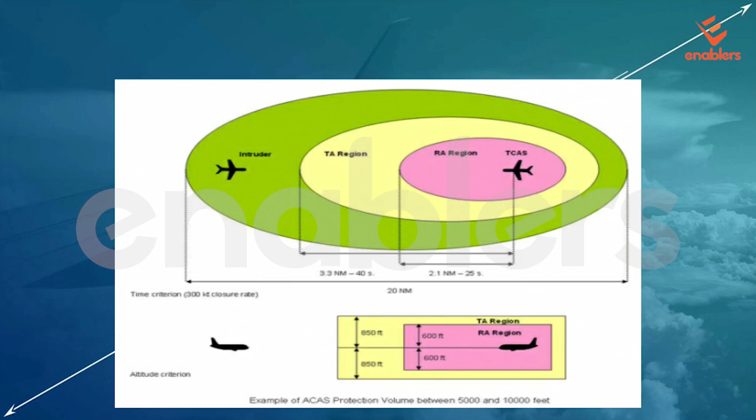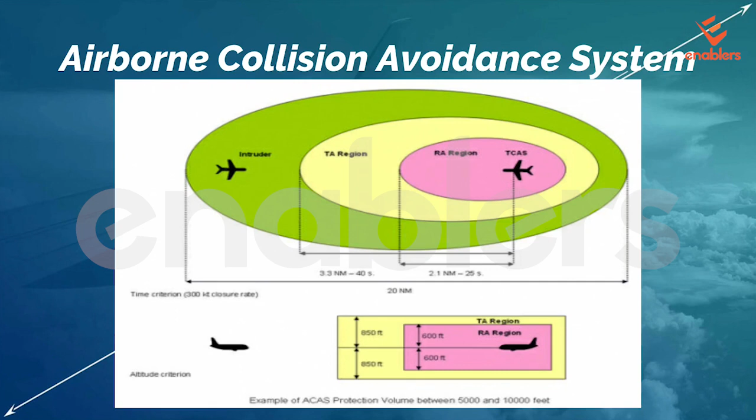An aircraft system which is based on secondary surveillance radar transponder signals, which operates independently of ground based equipment, and it is used to advise the pilot on potential conflicting aircraft that are equipped with SSR transponders, meaning secondary surveillance radar transponders.

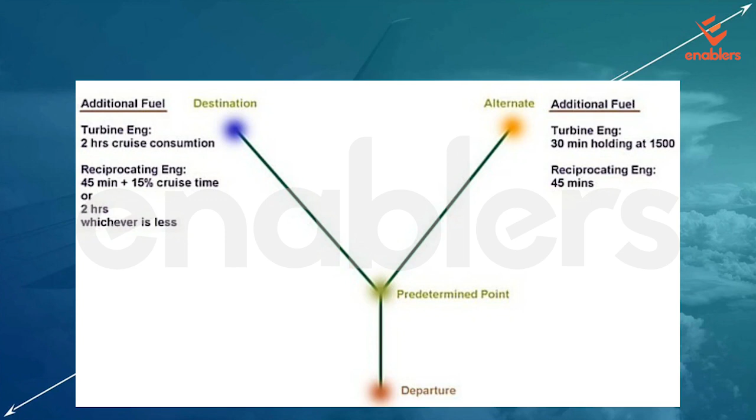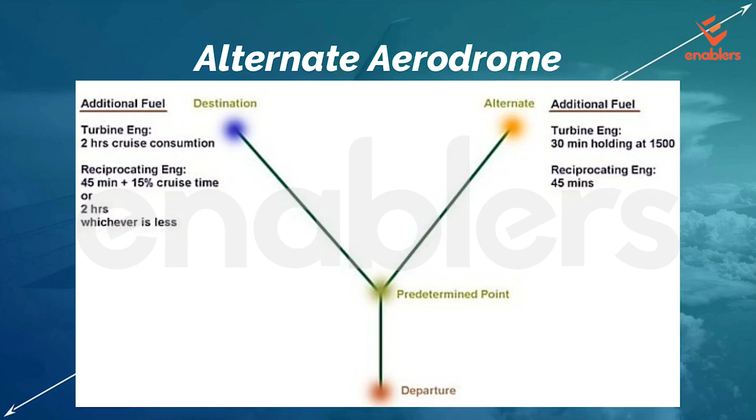Alternate aerodrome includes the following: First of all, takeoff alternate - an alternate aerodrome at which an aircraft can land should this become necessary shortly after takeoff, and it is not possible to use the aerodrome of departure. This is takeoff alternate. Next is en route alternate.

En route alternate is an aerodrome at which an aircraft would be able to land after experiencing an abnormal or emergency condition while en route.

The next are the requirements for the en route alternates. These are specific requirements, like according to Federal Aviation Regulation Part 139, the en route alternate must be certified, and they must be suitable to safely operate the aircraft, and they must have a minimum RFF index A or category 4 according to ICAO.

They must have response capability within 30 minutes. Must have field reporting conditions and reporting METARs and instrument approach. The airport must be available but it does not need to be continuously open. These are all the requirements for the en route alternates.

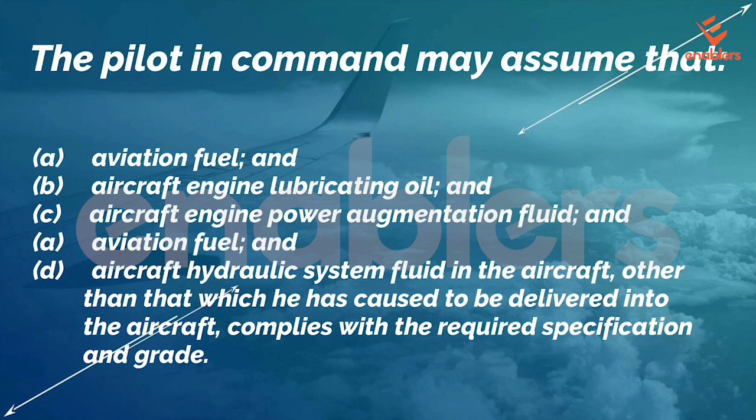Pilot in command of an aircraft shall ensure that the aircraft is not flown unless the aviation fuel, aircraft engine lubricating oil, aircraft engine power augmentation fluid and aircraft hydraulic system fluid used in connection with the services or operation of the aircraft complies with the specification and grade required or approved for the purpose by the authority. The pilot in command may assume that aviation fuel, aircraft engine lubricating oil, aircraft engine power augmentation fluid and aircraft hydraulic system fluid in the aircraft, other than that which he has caused to be delivered into the aircraft, complies with the required specification and grade.

Next is fueling of aircraft and location of aircraft. During fueling operations, the aircraft and ground fueling equipment shall be so located that no fuel tank filling point or vent outlet lies within 5 meters of any sealed building, within 6 meters of other stationary aircraft, within 15 meters of any exposed public area, within 15 meters of any unsealed building in case of aircraft with a maximum takeoff weight in excess of 5,700 kg, and within 9 meters of any unsealed building in case of aircraft with a maximum takeoff weight not exceeding 5,700 kg.

5,700 کلوگرام۔ نیکسٹ از فیولنگ ود پیسنجرز آن بورڈ۔ اس چیز کو انشور کیا جاتا ہے کہ پیسنجر ایئرکرافٹ پر نہ ہوں جب ایئرکرافٹ فیولنگ ہو رہی ہو۔ ایئرکرافٹ پر پیسنجر ہوں نہ انٹر ہو رہے ہوں یا ایئرکرافٹ سے نکل رہے ہوں، مطلب تب ہی فیول جو ہے وہ لوڈ ایئرکرافٹ میں نہیں کیا جاتا۔

ایئرکرافٹ میں فیول جو ہے وہ لوڈ کیا جا رہا ہے اور پیسنجر آن بورڈ ہیں یا انٹر ہو رہے ہیں یا لیونگ دی ایئرکرافٹ، دے آر ٹولڈ دیٹ fuel is loaded. So fuel is to be loaded and their seat belt must not be fastened while fuel is loaded, and they must not smoke, use any electrical equipment other than medical equipment used for treating a patient, the operation of which will not affect the safety of any person on board, or do anything that causes fuel vapors to ignite during the loading.

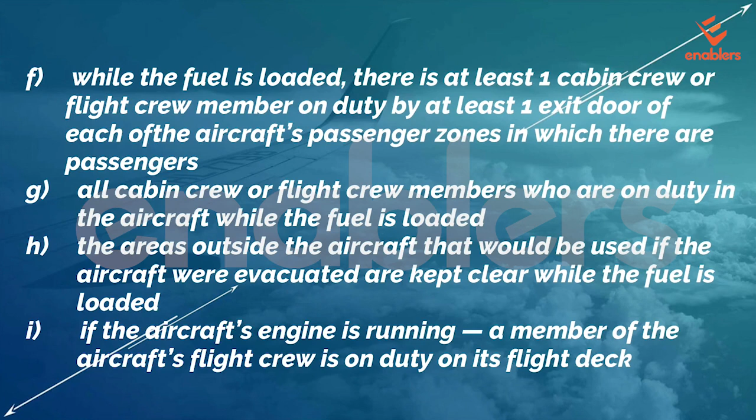The area outside the aircraft that would be used if the aircraft were evacuated is kept clear while fuel is loaded, and if the aircraft's engine is running, a member of the aircraft flight crew is on duty on its flight deck.